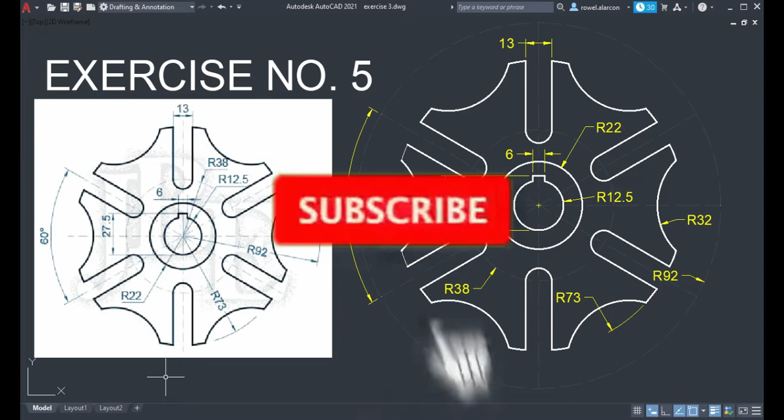Sa video ito, gagawin natin ang ating exercise number 5. Make sure nyo na naka-on yung inyong object snap tracking o yung ating F11. Then, checkan nyo yung endpoint, center, quadrant, and intersection mode sa ating object snap.

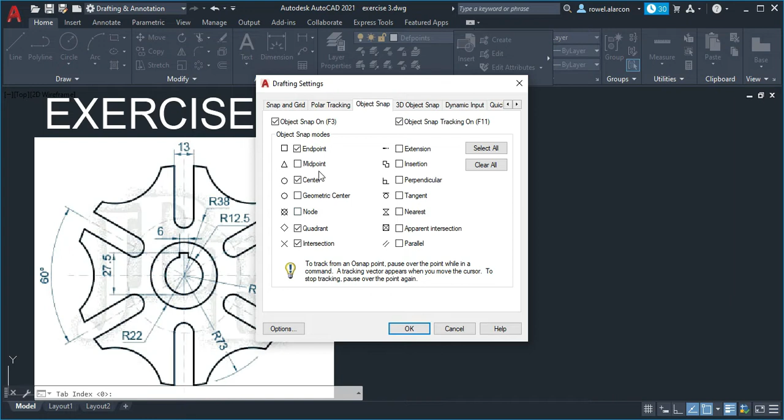Okay, sa oras na ito, magsisimula ako sa ating circle with a radius of 92.

Next, gagawa ako ng line from quadrant to quadrant.

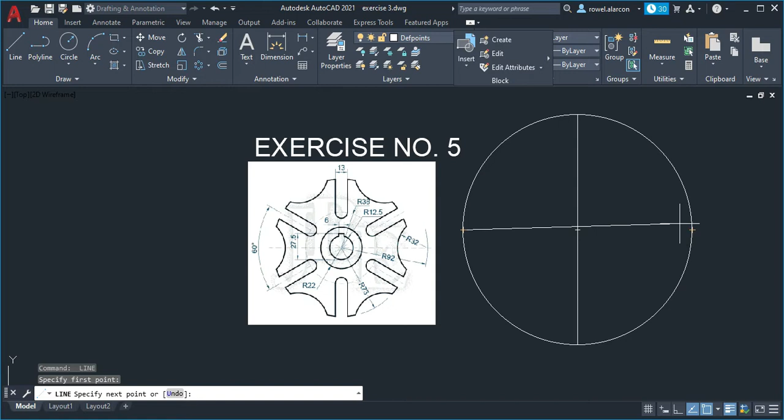Okay, next, gagawa ako ng circle with a radius of 12.5.

Next, with a radius of 22.

Next, with a radius of 38.

Next, gagawa ako ng line with an angle of 30. So, ito yan. Dahil ito ay 60 ang angle niya, hinati ko, so magiging 30 ang kanyang angle.

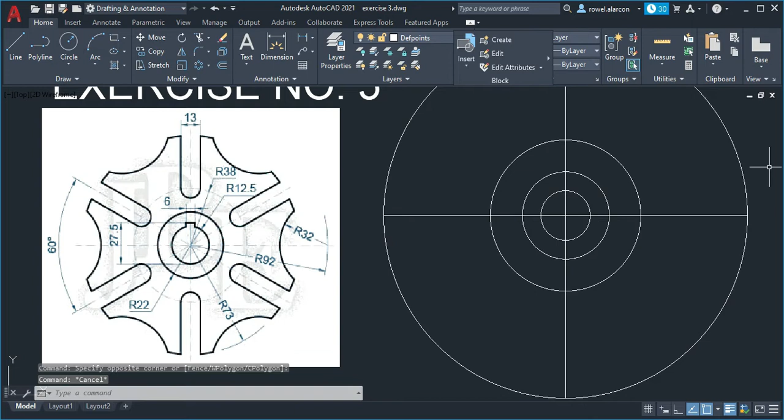Okay, dynamic input on, then line. So, 92 ang kanyang distance o length. Then, tab with a 30.

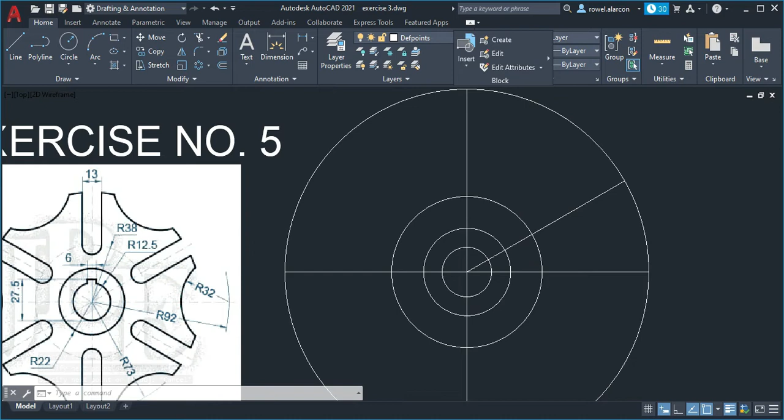Next is mag-o-offset ako ng 6.5 para makreate ko itong 13 na distance. Okay, offset, with a distance of 6.5.

Okay, next, gagawa ako ng circle with a radius of 32. Ito, so yung aking magiging center point is from the quadrant of circle na 92 radius. Dito, so C, 32.

Next is maglilinis na tayo. So this time, yung aking big circle, this and this, ay gagawin ko siyang imaginary line. Ito, this and this.

Okay, next, gagawa tayo ng circle with a radius of 6.5 para dito. Okay, so circle, 6.5.

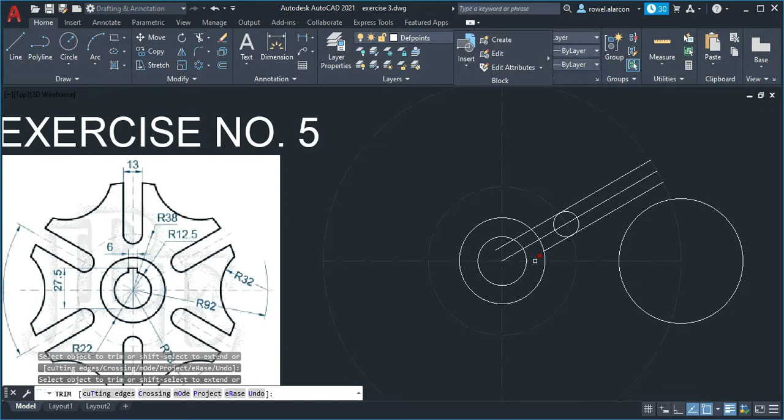Then after this, magti-trim tayo. Okay, so, trim.

Okay, then ito. Okay, then next is gagawa naman tayo ng circle na 73, with a radius of 73.

Okay, then iti-trim natin ito.

Then ito, gagawin natin itong imaginary line.

Okay, next, i-delete ko ulit ito. Okay, so, i-off ko yung aking imaginary line.

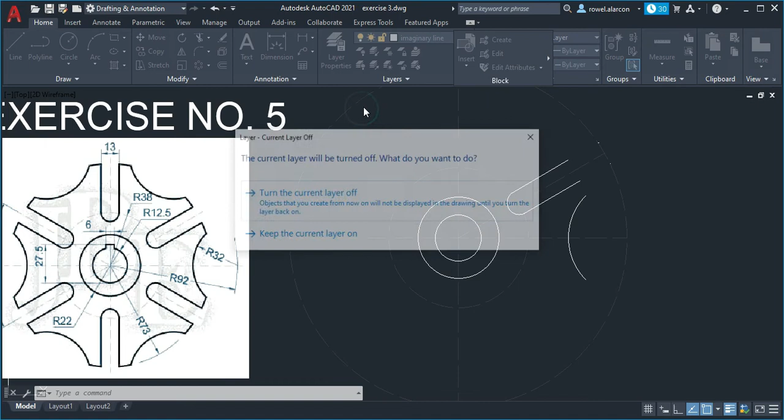Okay, so kung marunong na kayong gumawa ng layer, i-apply natin to, yung layering. So off natin.

Next is mag-a-array tayo. I-array natin ito, so polar array. Then enter.

Okay, so 1, 2, 3, 4, 5, 6. So 6 item, then enter.

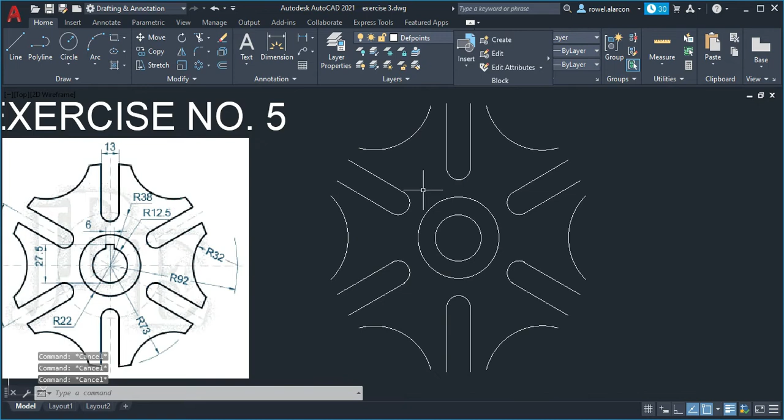Next, gagawa naman tayo ng circle with a radius of 73. Okay, then magti-trim tayo ulit.

Okay, next is yung part na ito. Meron daw distance na 27.5 from this point up to here. Okay, line, with a distance of 27.5.

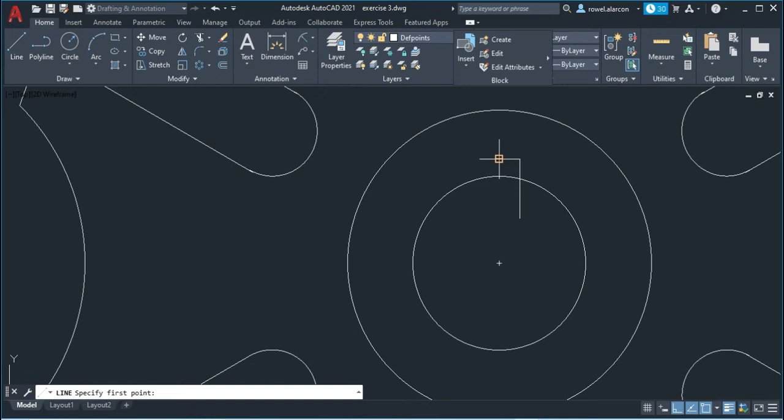Then, meron daw length o distance na 6. So, ating kunin sa gitna, so 3. Then downward, so walang specific na length, basta mag-intersect siya dito sa ating circle na ito. Then next, kabila naman, 3, then downward. After this, iti-trim natin.

Okay, next is gagawin na natin, o maglalagay na tayo ng ating dimension dahil natapos na natin yung ating object.

So, explode ko muna ito. Okay, then piliin ko to na object. Okay, next.

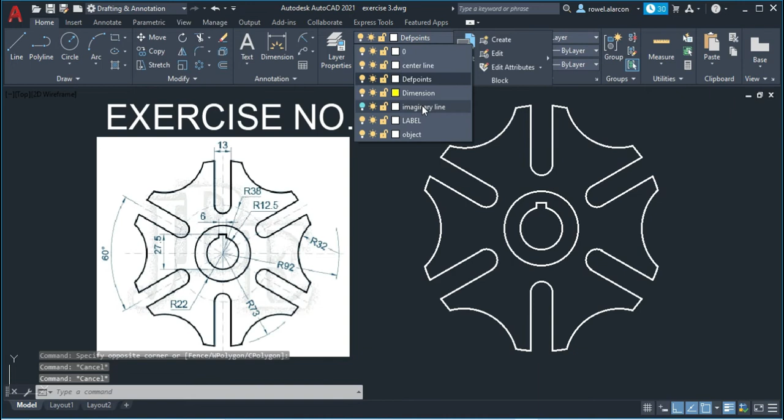Next is i-mirror ko ang part na ito. Okay, so mirror. Next, itong naman ang aking i-mirror.

So, pwede na tayong maglagay ng ating dimension. Okay, kung papansinin nyo, yung opacity ng aking imaginary line sa aking layering ay hindi ganun kalinaw dahil in-adjust ko yan dito sa aking layering, so ang kanyang opacity ay 90.

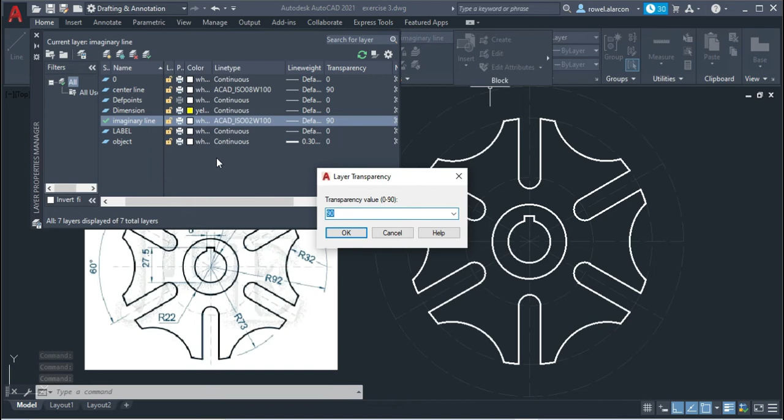Okay, next naman natin, maglalagay na tayo ng ating dimension. So, angle, this part, 60 degree.

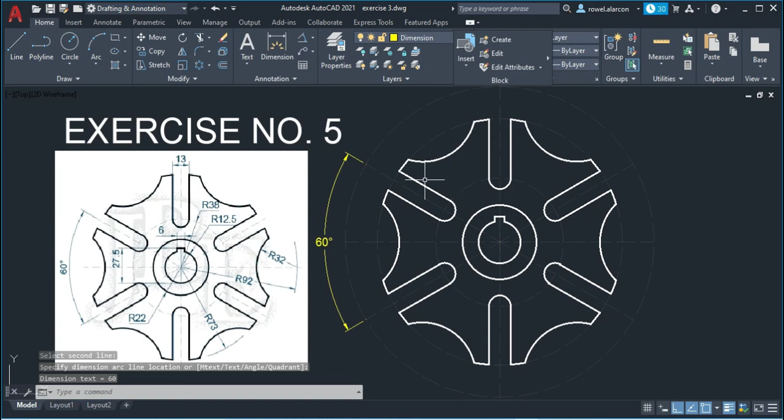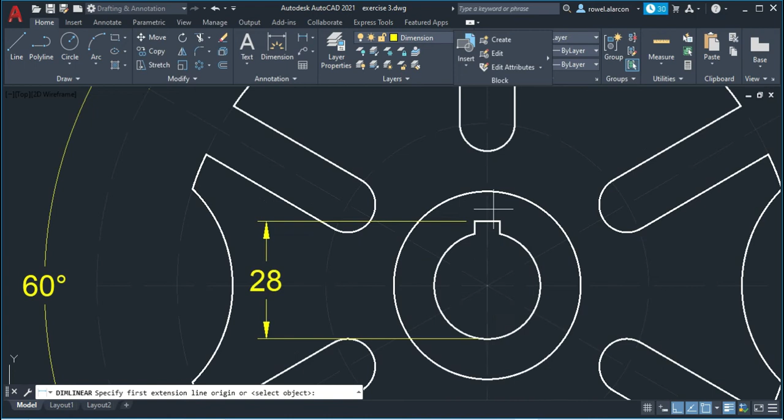Okay, then next, yung ating linear. So, this part. Okay, then next.

Okay, next, yung ating mga radius. So, this. Okay, so kung papansin niyo, yung ating radius na 13 and 28 is hindi the same dito sa ating image.

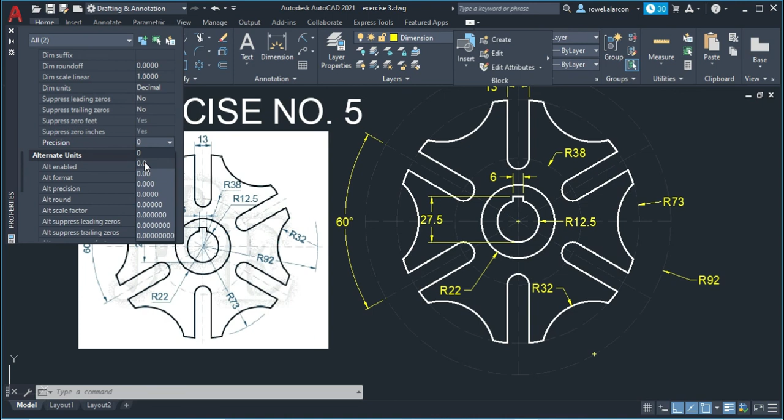Okay, adjust natin yung ating precision dito sa properties. Then, okay, so.

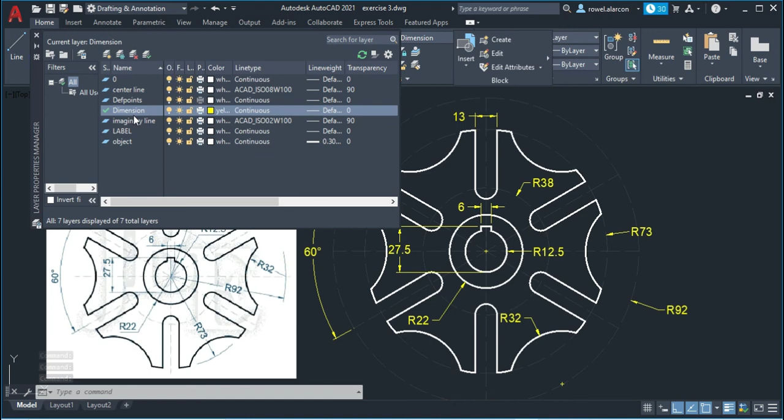Ayan, okay, so naglagay ako dito ng aking layering dito. So, label, object, dimension, imaginary, and center line.

I hope nakatulong ang bidyong ito sa paggawa ng ating exercise number 3. So that's all, thank you.